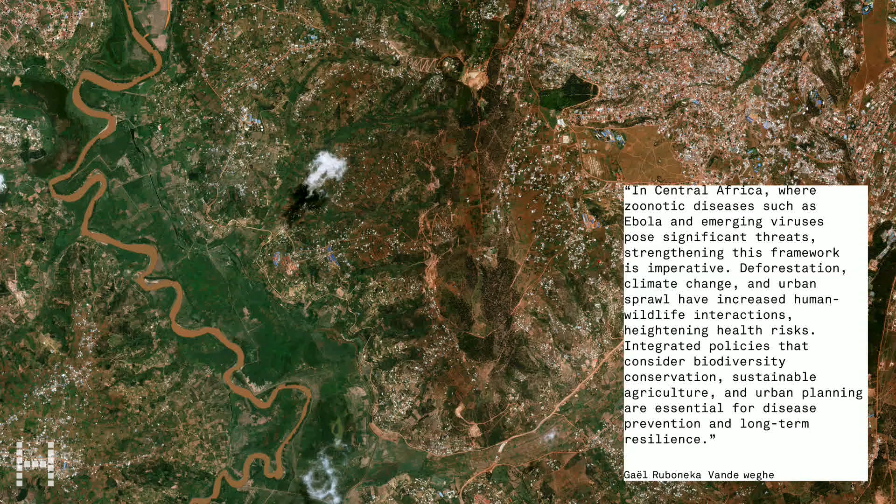Reflecting on the significance of this prize, my thoughts are drawn immediately to several illuminating conversations I was fortunate to have with the late Professor Kongjian Yu during his visit to the project site in Rwanda. Our time with him was extraordinarily insightful and enriching. He conveyed a palpable sense of optimism

for the continent's future, a vision deeply rooted in his groundbreaking sponge city concept, which champions ecological infrastructure over conventional gray solutions. He spoke with immense reverence about the essential work of farming and the life of a farmer, a subject of deep personal passion that profoundly informed his visionary approach as both an educator and as a practitioner.

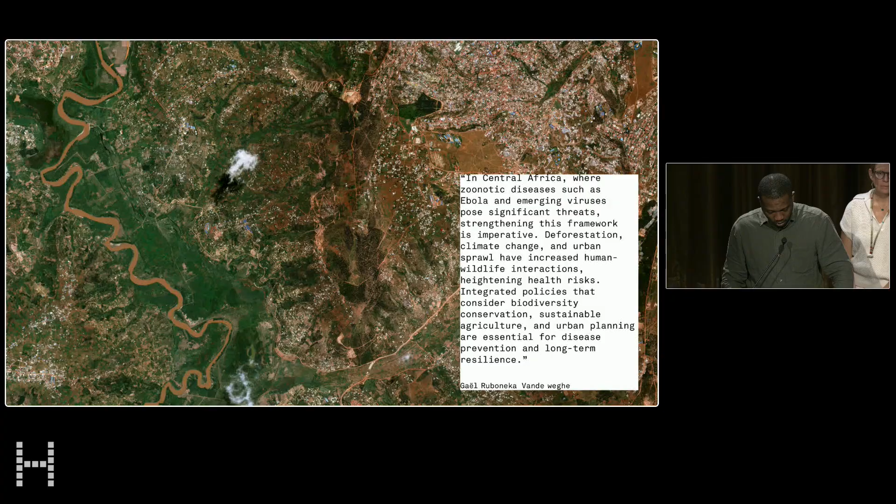Gaël Ruboneka Vande weghe, a friend of ours, an ecologist and a photographer of many of the images in the presentation you're going to see tonight and in the exhibit outside. As we worked on this project, he helped us understand the connections between ecology and urbanism.

He said, and I'm going to quote: "In Central Africa, where zoonotic diseases such as Ebola and emerging viruses pose significant threats, strengthening this framework is imperative. Deforestation, climate change, and urban sprawl have increased human-wildlife interactions, heightening health risks. Integrated policies that consider biodiversity, conservation, sustainable agriculture, and urban planning are essential for disease prevention and long-term resilience."

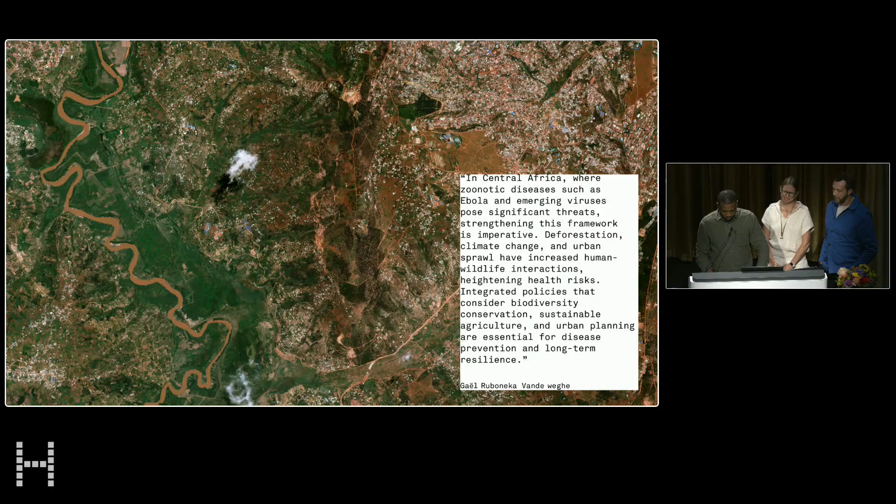RICA became a test of these ideas and how an institution could align food systems, biodiversity, and health into one coherent landscape of resilience. I am, and I'm sure all of us are, looking forward to sharing more with you tomorrow during the workshops, for those that will make it. But for this evening, I will let my colleagues Alan and Sierra take us through some of the basics of the project. Thanks.

Before we continue on, I just also want to thank Joan and the jury. It has been fantastic getting to know you, the exhibitions team who made something that is completely overwhelming out in the hallway. It's really fantastic to see the project in this new light. And we see receiving this award as an intentional expansion of what urban design means, to show how even a rural project can model the systems of care, economy, and identity that define healthy cities.

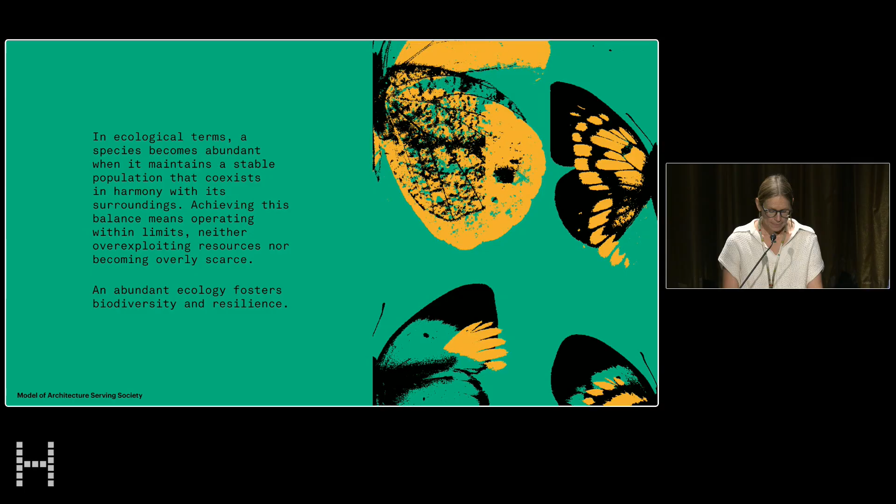In ecological terms, a measure of species abundance has to do with a habitat that can support the highest rate and level of diversity. And a measure of habitat, while in continual oscillation, can be described as abundant when diverse populations are thriving in balance with each other. That was our goal: to design towards abundance, a campus that demonstrates how human life and natural systems can coexist in a state of mutual benefit.

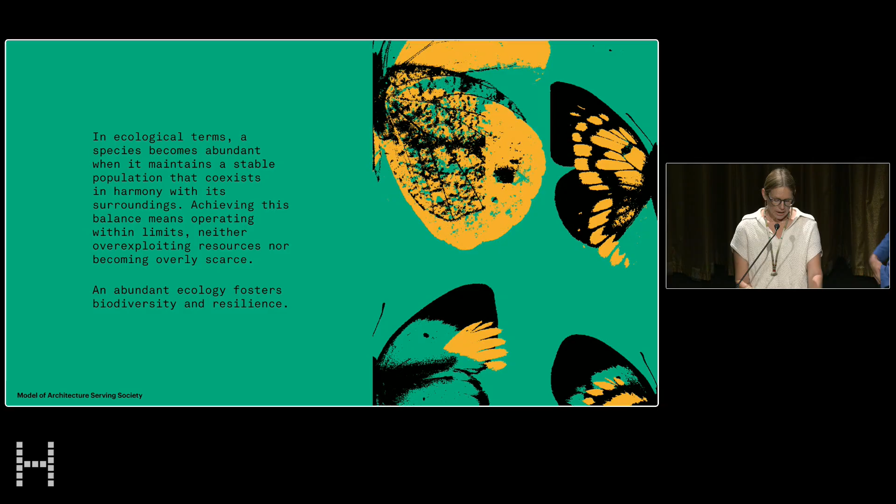I will begin with a bird, the gray-crowned crane. It is one of the most beautiful species in East Africa, now endangered with fewer than 1,000 left in Rwanda. It roosts in the acacia trees in the evening and feeds in the papyrus wetlands throughout the day.

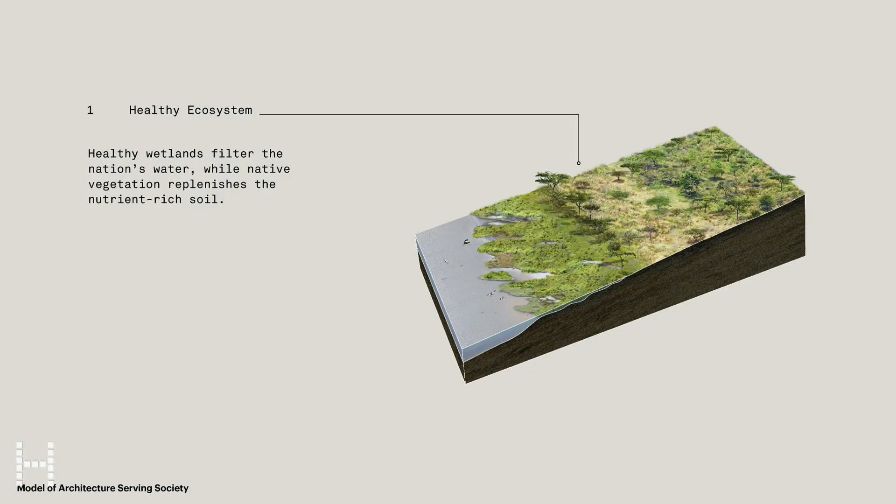When these systems cease to function, the landscape goes silent, and productivity decreases. While these images are specific to the lake and hillsides of Rwanda, the Rwanda Institute of Conservation Agriculture, this is indicative of what has happened across Rwanda for the past 30 years. Land has been cleared for farming, grazing, and firewood.

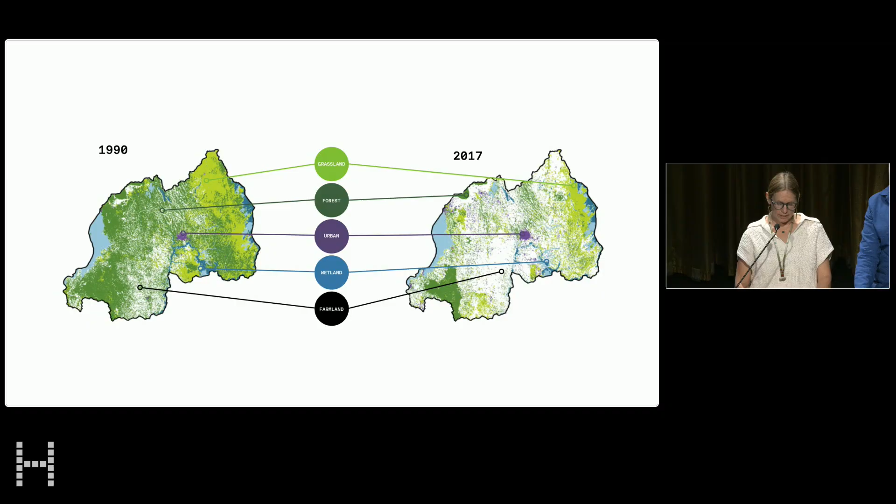The population has tripled in 50 years and is projected to double again, putting incredible pressure on the land. The question we faced was simple but urgent: how can one piece of land support twice as many people without destroying the systems that sustain it?

Our approach began with One Health, the understanding that human, animal, and ecological health are inseparable. In fact, when we started this project, there wasn't a curriculum for the Rwanda Institute of Conservation Agriculture, and we used One Health to frame it, to create something to respond to with our design. It was taken on by the university and is taught there today. It's evolving, but still there.

It meant organizing the campus so that healthy soils, clean water, and intact habitats were as central to productivity as irrigation and seed yield. In that way, the students' daily experiences become a living model of how the health of people and the health of the planet are one and the same.

We also place the project within the global context of planetary boundaries, the limits that define a safe operating space for humanity. Our goal was to design within those limits, to stay inside the ecological envelope while still achieving growth, education, and economic development, amongst other things.

Together, these frameworks drove our decision-making: where to build, what to preserve, and how to use resources in balance. This is the same question facing our cities: how to grow within limits while regenerating what we depend upon.

At RICA, we discovered that the site contained one of the last intact savanna woodlands outside of Rwanda's national parks. It was the crane's former habitat, a living reminder that agriculture, biodiversity, and human survival are completely intertwined.

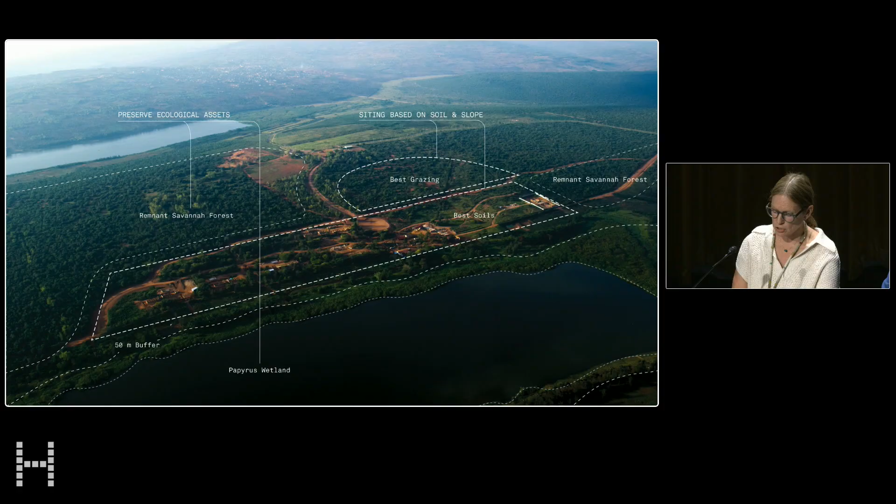We reconnected it to the papyrus wetlands and the lake's riparian edge, letting ecological processes determine the spatial plan of the campus. Why does this matter in urban design?

Because Rwanda is one of the most densely populated countries in Africa, but not in all cases urbanized. Due to traditions of land inheritance, people were spread evenly across the land. The same questions of density, infrastructure, and community identity apply here, just in a different form.

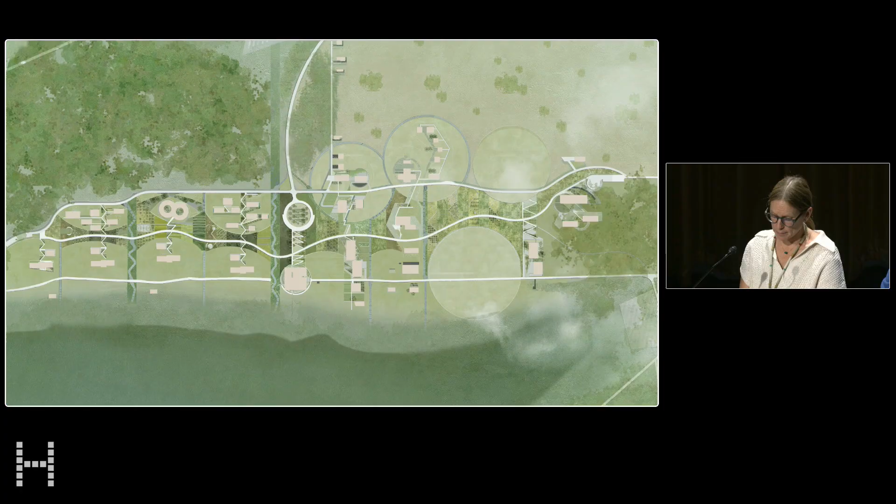RICA models a kind of rural urbanism, a networked, productive landscape where ecological function and economic life are interwoven. When you propagate a campus, you are not only instigating processes, you are also uplifting the species collected there.

In this case, the campus is a research plot, a seed bank, an arboretum for agricultural collections, and a nursery for native species. With local partners, we propagated roughly 1 million native plants, starting from seed and cuttings collected on site. This choice matters: it preserves local genetics, accelerates ecological succession, and reduces transplant stress and irrigation needs.

Students walk through these plant communities every day. The landscape is their first teacher. The act of planting became part of the curriculum, a living demonstration of regeneration.

We designed the plant palette to catalyze future habitats. Early succession species repair the soil. Shade and framework trees establish structure. Flowering and fruiting species feed pollinators, bats, and birds. Every layer of planting was chosen to invite wildlife back, to turn a quiet site into a thriving multi-species campus.

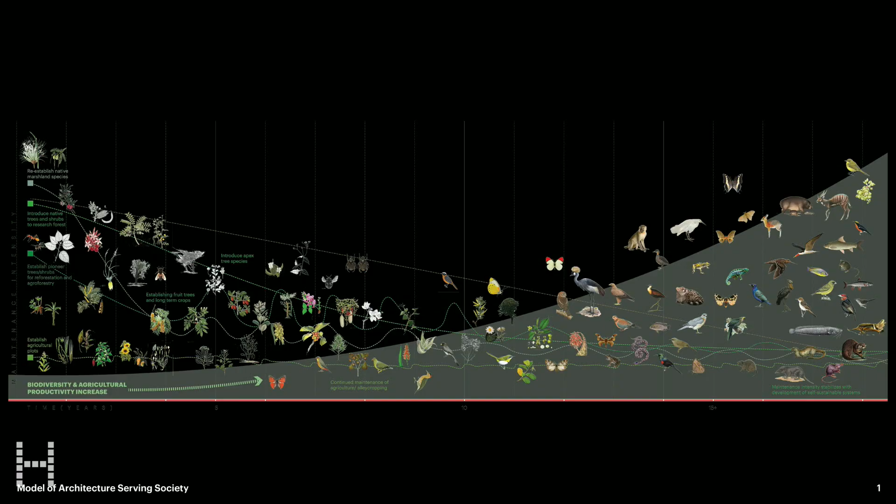Already, insects, birds, and mammals have returned, and the soundscape has changed. Hopefully, the cranes will be there soon.

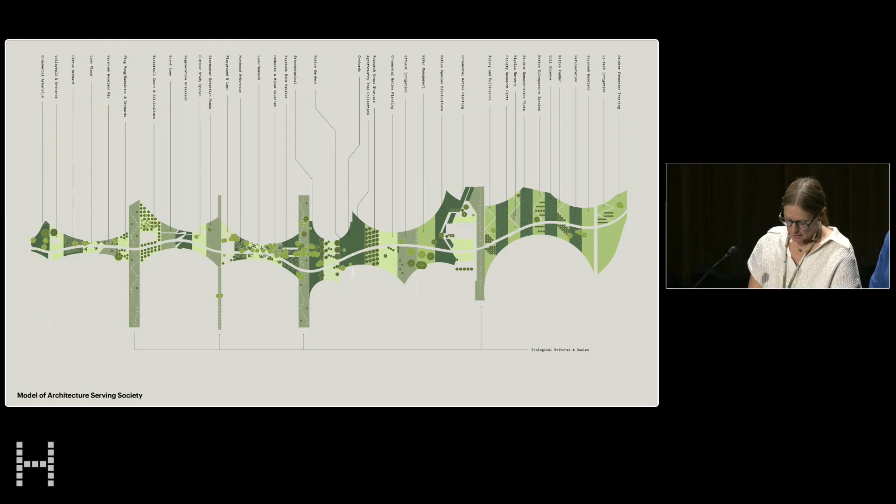The campus master plan integrates agriculture and ecology as one continuous system. Green strips of cropland alternate with conservation corridors, connecting papyrus wetlands to upland savanna. Stormwater moves through swales and retention ponds that double as teaching landscapes. Every feature serves a dual purpose: function and pedagogy, production and restoration.

Today, we're seeing the results: the return of pollinators, the proliferation of flora and fauna, and the rebirth of the soundscape. This is abundance made visible, not an abstract idea, but a measurable transformation of land and life. The landscape has become a teacher, a carbon sink, a habitat, a symbol of possibility. What RICA taught us was how to make these approaches work across disciplines, which Alan will expand upon.

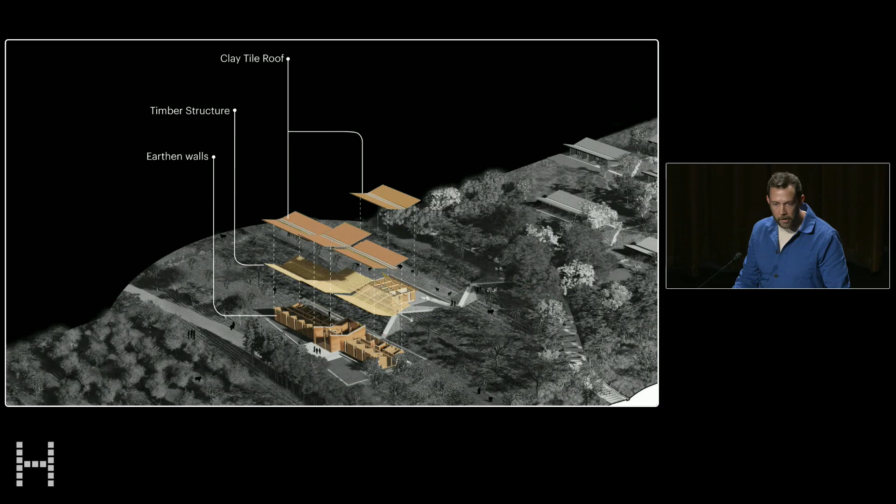The structure of RICA is deliberately elemental. Stone foundations reference the act of removing stones from the soil in order to prep it for farming. Compressed earth walls and earthen bricks symbolize the importance of soil health in agriculture. Timber trusses represent the value-added product, the potential of fields like silviculture. And terracotta tile roofs, fired locally, reference that value-added product, taking the raw good, turning it into something more valuable.

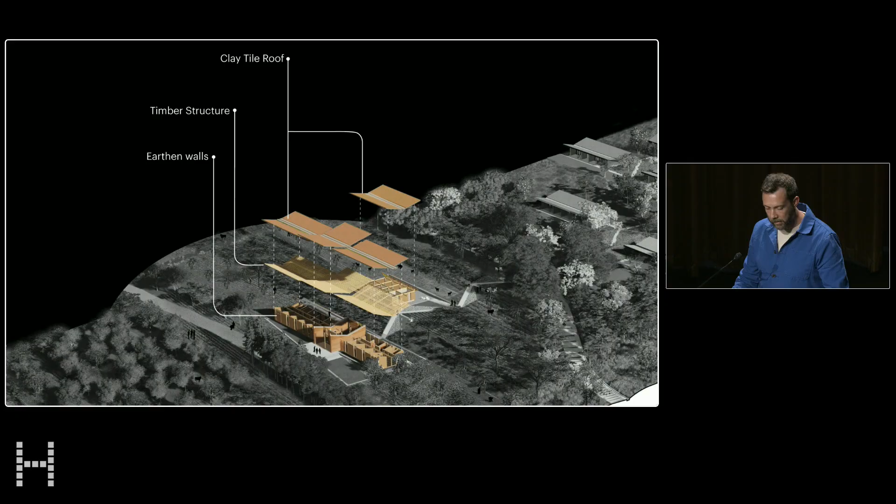These materials are low carbon, renewable, and they're also part of Rwanda's vernacular memory. In a country where very few building materials are manufactured or produced, the alternative is importing goods from far away, shipped to Tanzania, trucked overland into the country. So this is both a sustainability argument, but one about economic development.

These buildings show that a modern academic campus can be built with the same ecological influence that sustains its landscape.

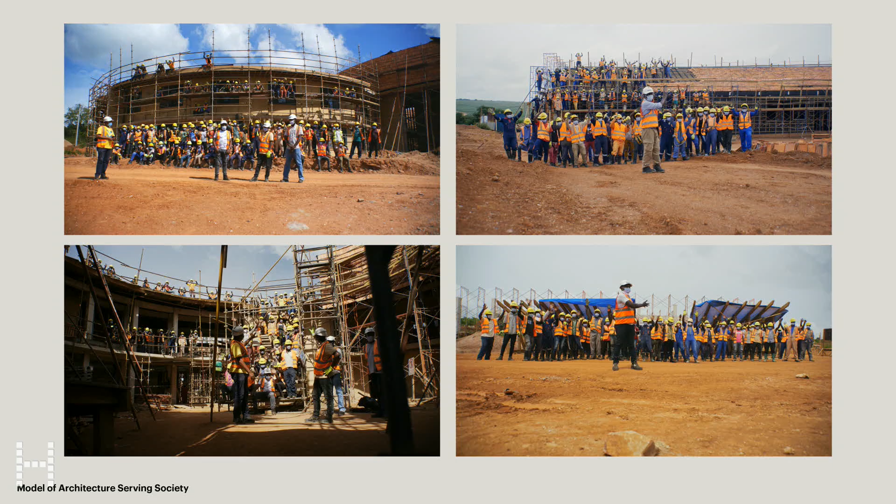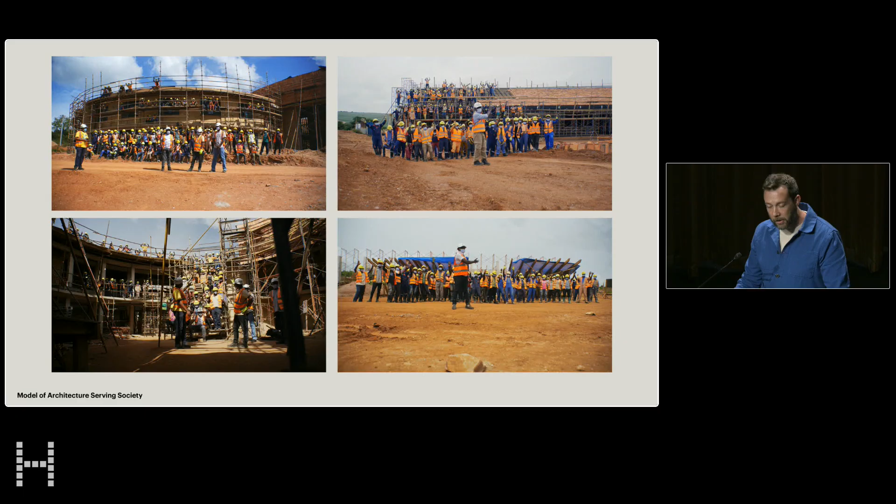Halfway through construction, the original contractor became insolvent. This was also at the peak of the pandemic. Rather than pause, Chris Hardy and some of our other colleagues that are here today went to the laborers who were laid off that day with suitcases filled with cash to pay them out for their final payments and rehire them. MASS rehired all 2,500 workers that same day and continued construction, navigating not only the complexity of the project, but also the pandemic. That decision turned a potential crisis into an opportunity for collective ownership.

Because we controlled procurement, we could trace every material from extraction through installation, managing both the origin and the provenance of these materials as well as the ethics that were deployed along that whole value chain. It meant fair labor, more transparent supply chains.

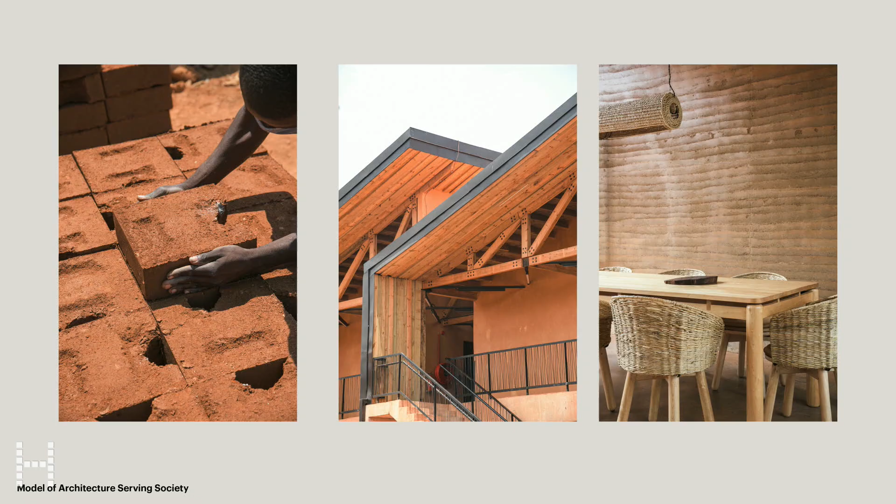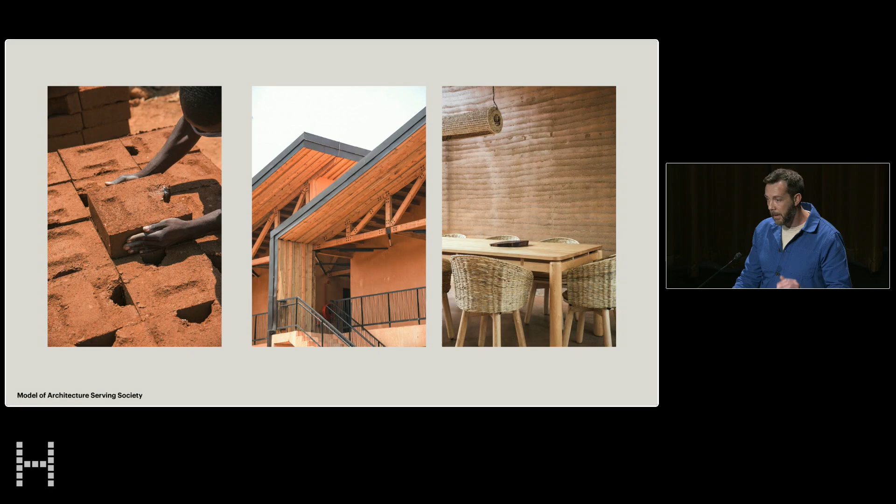All told, this means that the majority of the $75 million it cost to build the project went into the local economy. By treating every decision, every material selection as a choice to invest in this place, we're able to make sure that the maximum value is delivered into the community that is being intended to serve.

We measured embodied carbon for every system. This, in many cases, meant doing it ourselves. But because we had access to the whole supply chain, we could quantify each of these products.

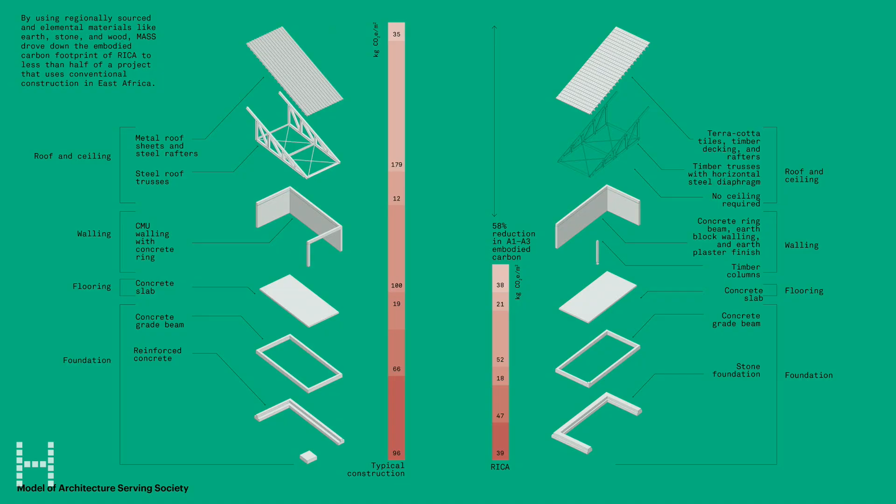Conventional concrete and steel structures in East Africa average roughly double RICA's footprint. But through local sourcing and earthen materials, we cut that in half. Simple decisions like shifting from reinforced concrete foundations to stone, centuries-old methods that we no longer even consider, had radical impacts, as well as the earthen walls, and instead of imported steel and tin roofs, wood trusses and terracotta tile.

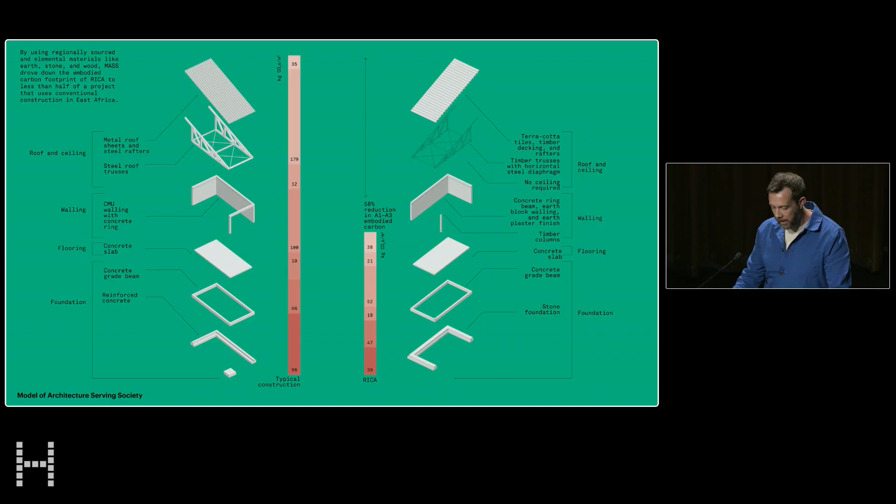The influence of RICA now extends far beyond its boundaries. We think of our work as happening in three stages.

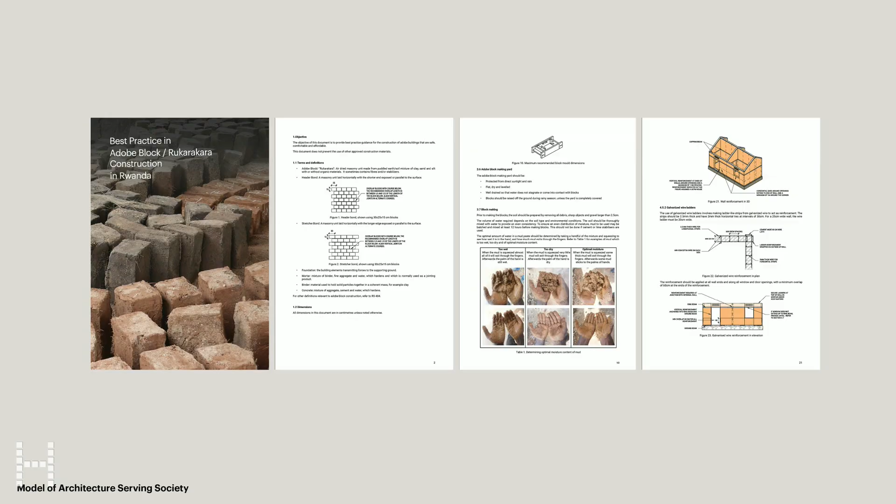Research trying to understand the challenges and define the opportunity for design to intervene, pilot projects that can demonstrate what's possible, and then advocacy to bring that impact to scale, seeing the way these examples and research can shift markets and influence policy.

One of our proudest accomplishments actually comes out of something adjacent to this project. The use of earthen construction had actually been outlawed under the building code because of risks of it being unsafely built in a place of steep hillsides with heavy rainfall and the potential for mudslides.

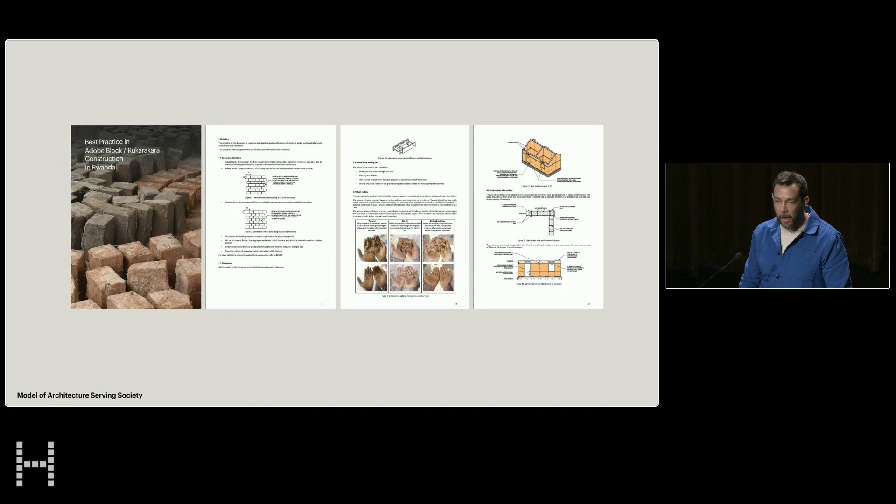When government officials visited the project and saw it deployed in this way, we were invited to be part of a working group with the government and several other partners to develop this guide about adobe earthen construction in the country, to actually change the building code and develop a handbook to guide people in safe construction.

But these decisions also strengthen supply chains for sustainable forestry and ceramics, where we see people starting their own businesses, just as in our first project that saw the volcanic stone walls of Butaro spread throughout the country.

Now building with earth is much more common. You're seeing rammed earth walls in places as restaurants and boutique hotels, and including even the new airport.

It also expanded curricula, merging conservation agriculture with material science, seeing building industry and building goods as one of the things that agriculture can actually contribute to.

And most importantly, it proved that a large-scale academic institution can be off-grid, climate positive, and community built. This is a model for development in East Africa, but we hope also beyond.

But ultimately, as hard as we work to reduce the environmental impact of our buildings, construction is inherently extractive. In order to not just minimize harm, but to restore and regenerate, we depend on landscapes.

At RICA, 1,400 hectares of land creates space for conservation and regeneration. The investment in planting over one million plants, building soil health, conserving the savanna woodland, and restoring the wetland marshes means we will offset all of the embodied carbon of construction by 2040.